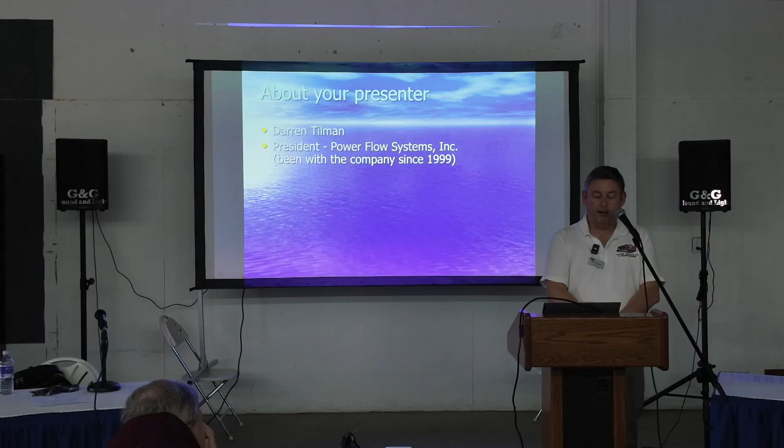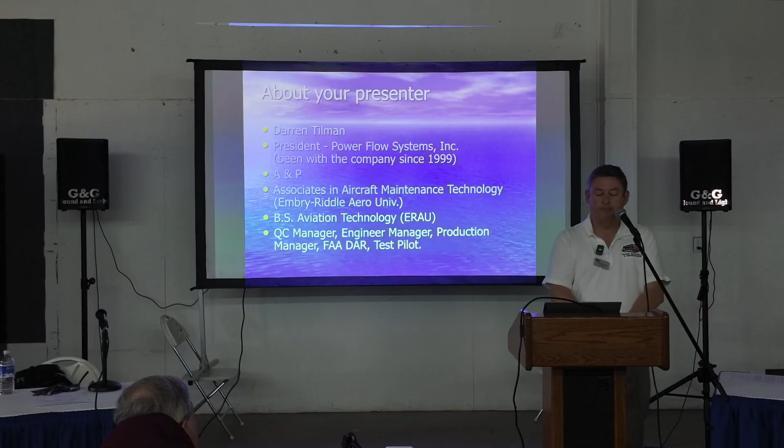So Power Flow, we're in Daytona Beach, Florida. I am an A&P. I got my associate's degree from Embry-Riddle in aircraft maintenance technology, and I got a bachelor's degree from Embry-Riddle in aviation technology, and I got my chapter 11 from Embry-Riddle, courtesy of the bills. I kid, it was expensive when I went like 30 years ago, but today it's literally about 10 times more expensive. Doctors come out cheaper, I think. Yeah, small company. We're not as small as we used to be. We've gotten pretty big now, but technically I also hold the titles of engineering manager, QC manager. I'm also a DAR. The point of that is supposed to be that I do know some things, maybe.

All right, well, who are we? We're the leading designer and manufacturer of tuned exhaust systems for general aviation aircraft. We started in the early 80s messing around with things. We didn't get really serious until the late 90s. Got our first product certified in 1999. That's on the Cessna 172. And then we made a monster and kept going. We now are on 17 major aircraft, 4- and 6-cylinder aircraft engines.

We are also available on some experimentals, but only experimentals that have the real estate to put the kind of tuned systems in that we do. We've got about 7,100 of them flying right now. I'm confident there will be some with Power Flows coming in here tomorrow. We are the OEM exhaust system for the Diamond DA40 and their short-lived twin that had Lycomings. Not because of us, it's because they had to swap engines.

And how many of you ever heard of Leading Edge exhausts? Show of hands. Awesome. Great company. Unfortunately, the founder and owner of that company, Dane, passed away unexpectedly. And we heard about that and said, gosh, this is too good of a product to let it go. There's too many of you guys that may be seeing it or operating on it. We didn't want it to die. So we came along, and in the end, we were the only brave/stupid people that said, hey, we can make that go. And so here we are.

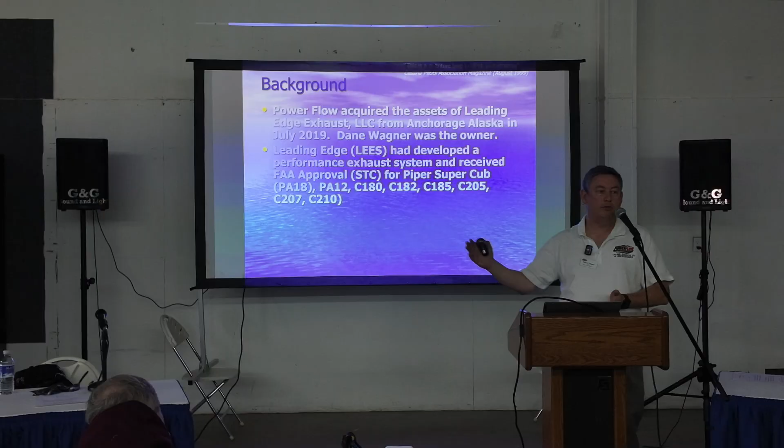We purchased them in 2019. They have an exhaust system for Cessna 180s all the way up through 210s, and then the Super Cubs. And it's a really, really cool product. So we took it, moved the company from Alaska all the way down to Daytona Beach, Florida, because we thought that would be fun. It's also where we are. And we had to learn how to essentially reverse engineer the product and then apply our own technology and engineering to improve on some minor areas and to get it into serial production. We're not quite fully done with that. We're almost at the end point. We've got everything back in full production except the Super Cubs, and that's starting right now.

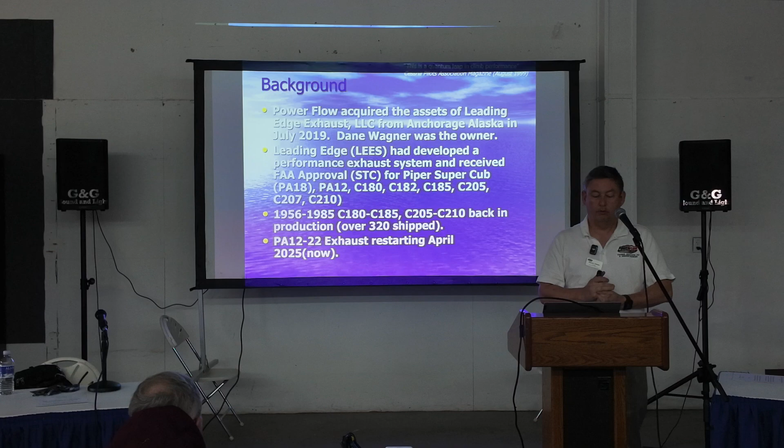Oh, look, I just said all that. We've shipped over 320 Cessna 180 through 185 exhaust systems as of like last week. So we really got them up and running now. The Piper Cubs and stuff, we have the first test cases that are out of house, shipping out over the next month. And those guys are going to confirm what we've done is working well, so we can

then release them. So as an exhaust design and manufacturing company, we have the benefit of looking back at the last 100 years of exhaust designs and saying, what really worked well and gives good longevity and good maintenance operationally. And then we also say, hey, what doesn't work? Tried to take the good ideas, get rid of the bad. In some cases, there is only one way to skin the cat, but there's a lot of other areas that there can be improvements, and we did strive to do that.

Okay, the 4 forces of flight. How many of you have this shirt? I mean, you can't be a pilot or mechanic without it, right? Now, I'm going to equally put down pilots and mechanics. I'm both, so I think it's fair game, right? So, is there anyone from the FAA here, before I make this joke? Anyone going to admit to that? There is a guy from the FAA back there. Okay, plug your ears. Are you here to help us? Always here to help us, that's good.

So, there's the FAA, right? That's a force on the aircraft. They don't teach that in pilot school, but it turns out that's the drag, right? Well, so pilots view mechanics as the drag. It's those darn mechanics always finding things wrong with the plane. Just let it go. Those stupid inspections, we don't like those things. They cost money. I had a really good A&P teacher, a good old boy from Georgia, who said, the mechanic's job is to separate the pilot from his wallet.

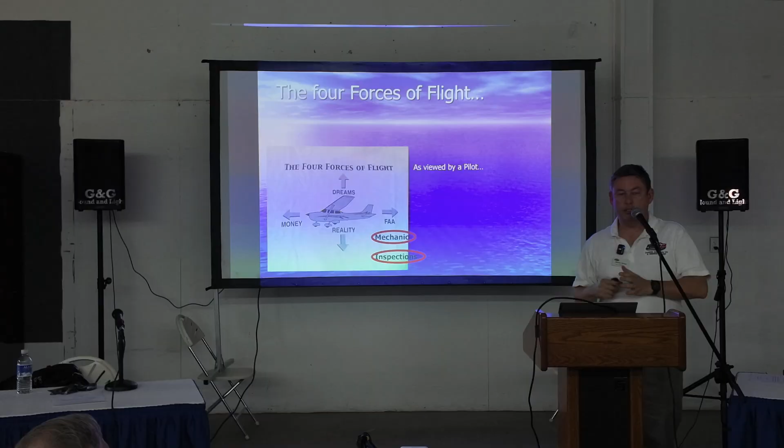Now, I didn't really feel that was a great way to put that, but you know, we're all trying to do the right thing. You want that airplane to fly. If you're going to be in it, that guy's family is going to be in it. You could be in it. You want to make sure there's no problems, right? So it's not really as adversarial as some people view it.

We're going to talk about 4-stroke engines, okay? What I'm going to talk about is in broad terms, because this is meant to be educational. You can apply some of the stuff I'm saying to larger displacement, smaller displacement, even 2 strokes. But it really varies quite a bit, so I'm just warning you. I'm going to talk about 4 strokes. We have a lot of expertise in both Continental and Lycoming at 320 and above.

All right, what's a detailed inspection? Anyone want to give me a sound bite? What would you call a detailed inspection on an aircraft? Well, an annual, okay. So, should an annual be, hey, it flew in, it should be able to fly out? Probably not, right? So the FAA, for good reason, says, hey, you need to have a detailed inspection on an annual. That's opening up your panels, checking the oil, checking your timing, doing all these things on the airplanes, things that probably have not been looked at in depth, at least for that prior year.

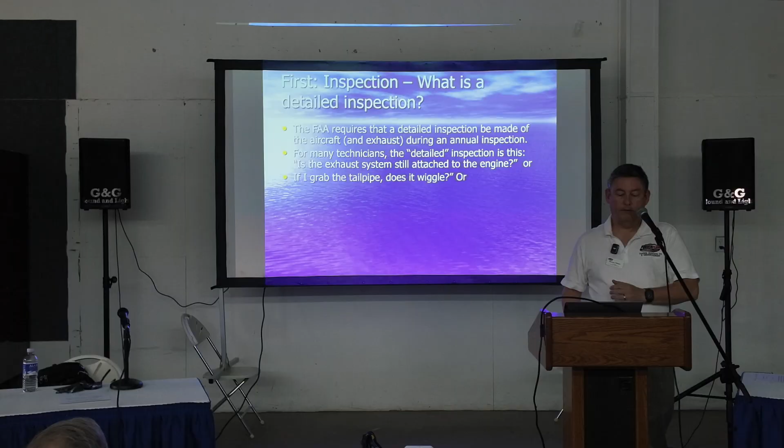Well, they also require a detailed inspection on the exhaust. Unfortunately, and you don't have to admit it if this is you, what a lot of people do, as I've seen in the field, is the detailed inspection on the exhaust system involves, hey, if I grab the tailpipe, did it wiggle? It didn't, we're good. Or, let's just use the CO sniffer to check to see if there's any leaks. Now that's a legitimate method of seeing, hey, is there any cabin heat violation, i.e. the exhaust is cracking and we're putting exhaust into the cabin heat area.

But that's not the whole thing. It shouldn't be the whole thing. It definitely is not the right thing. From my perspective, so much more should be done to the exhaust system. And that's a detailed inspection. So if the detailed inspection on the aircraft is, hey, let's open up things and take it apart and look, the same answer should apply to the exhaust, okay?

And let's face it, on a normally aspirated engine, most exhaust systems aren't really that hard to take apart. And in a lot of cases, the exhaust systems have things built into them that are supposed to be maintained and disassembled routinely. And if they're not, the built-in failure mode now occurs where the thing that's supposed to move can't. So guess what? It now stresses things out.

Why does it matter? Okay? The FAA has put out a whole study where they said, hey, the top reason for carbon monoxide poisoning is the muffler systems. Well, I mean, that makes sense. You're not getting CO from anything else.

In 92% of the cases, the muffler had more than 1,000 hours in time and service. So mufflers are generally where we get our heat from in normally aspirated aircraft. Why? We don't have a liquid-cooled engine usually. Yes, technically there's oil, but we don't use the oil radiator, so we're running air over that manifold. We want that air to be free of exhaust gas and issues.

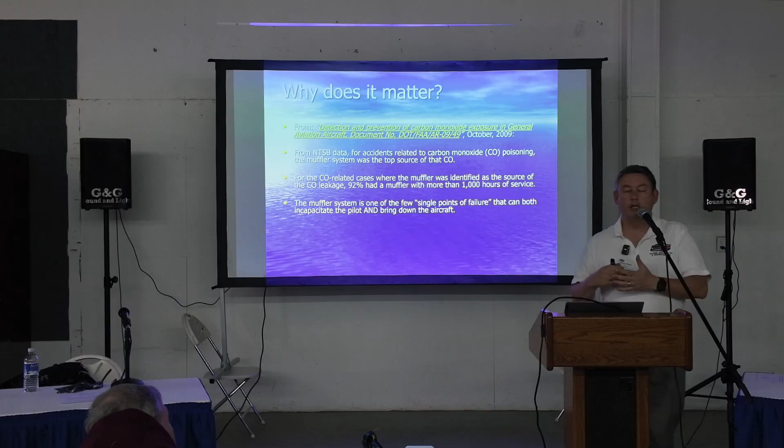Has anyone ever had CO in their cabin before that they noticed? You have? Yeah? How'd you notice it? We were getting kind of dizzy, and then the thing started turning black. The little, the dot of death? Yes, okay. So you were getting a little dizzy. So it was a known issue, though. It was a known issue. You're a brave pilot. We thought we fixed it, and we went up. That's fair. It wasn't fixed. Okay.

You know, CO is not something to mess around with. Yes, you had your early warning signs. You eventually saw the black dot. You noticed it. You were aware of it. That's good for you. You didn't continue the flight and say, well, I'll just breathe less. Because ultimately you were going to breathe less, as it turns out. Spoiler. So you want to be aware of that.

There are lots of tools out there for us pilots and operators that really should be taken advantage of. You've got CO detectors you can put in the cabin. Heck, you can go down to Home Depot or wherever and buy even a household one. They're not great, but they're better than the black dot; it's very passive. If you're not paying attention to it, you're not going to see it. And by the time it's turned black, it's probably not so good.

Lightspeed has a headset with a built-in CO detector. It's a pretty aggressive detector because it'll pick up gases that have circulated into the cabin just from weird airflow if you've got the windows open. But I'd rather have that as a warning than feel kind of faint and go to sleep. So we always want to be aware of that. Our job as mechanics is to make sure we are keeping it as safe an environment for the pilots as possible.

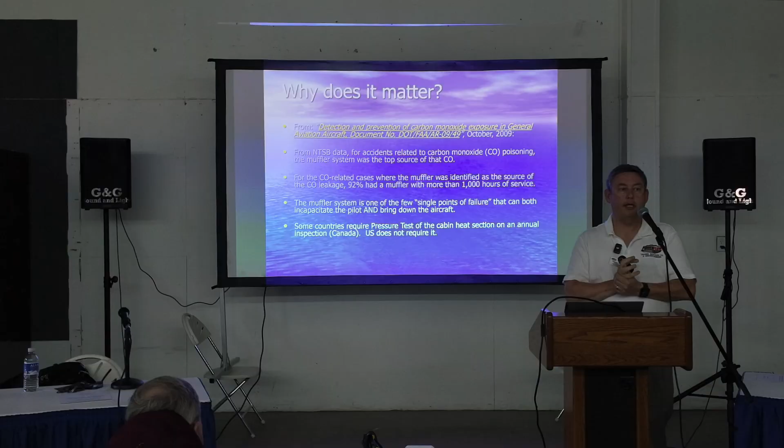Some countries require aggressive testing, i.e. pressure testing of the cabin heat. Oh, I gave it away. It's Canada. The US does not require that. Why? Is Canadian air different? It's colder? Well, it's apologetic too, but it doesn't make sense not to pressure test that. I don't know why it's never really come down past the border, but as a technician, I will pressure test things. It's not required, but I'm not going to be the one signing it off and saying, well, I could have looked at it and I didn't.

All right, stress and vibration, okay? What causes stress in aviation besides the FAA?

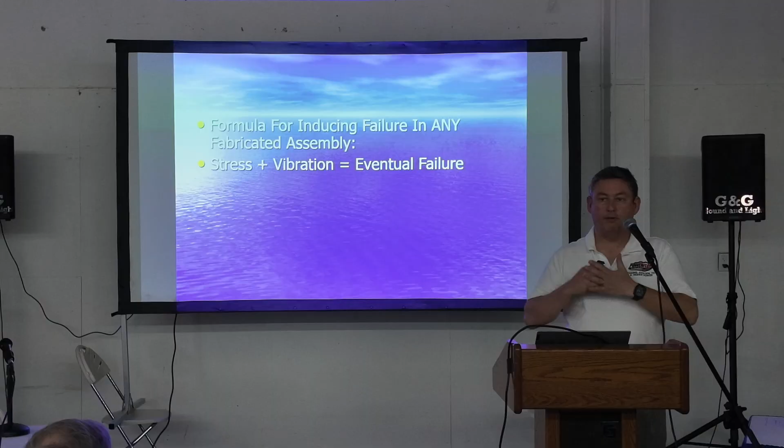Okay, well, all right. You're flying something, most of us are flying things with propellers and engines. It's a giant vibrating object, series of objects to be fair, right? And vibration is a stress, okay? So if you have something that's vibrating a lot, you're adding stress. You've got an exhaust system that's attached to an engine that's got 4 or 6 cylinders, pistons flying around, okay? And they are creating different harmonics and different resonances. Ultimately, things add up. So what do you want to do? You want to avoid that, or more correctly, diminish it.

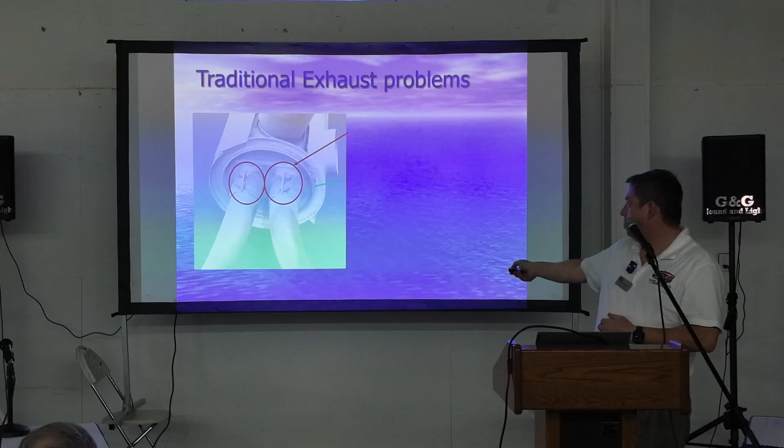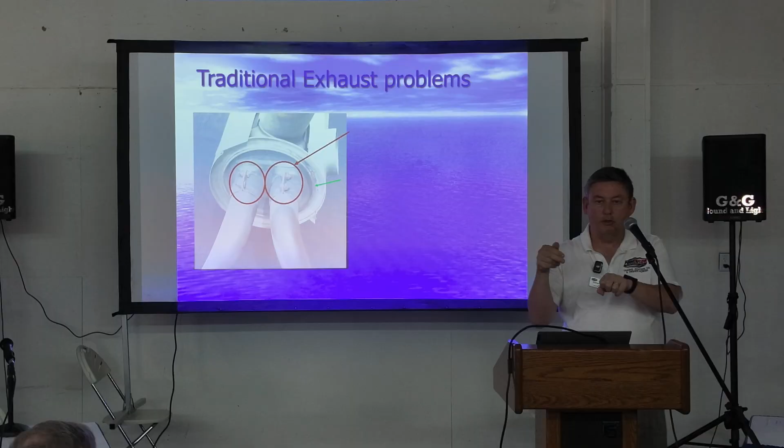So that's an okay thing, but what happens is your engine is nothing more than an air pump, and it's pumping air through. And so the ultimate effect of that, I'm going to exaggerate the motions, is this cylinder moves, and ultimately everything over here pumps in. So you get a little movement over here, then back here, and then back here. So what's happening is those risers and that central muffler assembly is getting pumped and pushed, and it wants to move. Eventually, it will make room.

You can't see it because of the way this is presenting, but there's some yellow streaking going on. That yellow streaking is exhaust starting to leak out, and it's from that movement. The failure mode on this is not something that happens in 100 hours. This is like 1,000, 2,000 hours typically, where those beads start to wear out. And the answer is, it's a part that's going to need to be replaced.

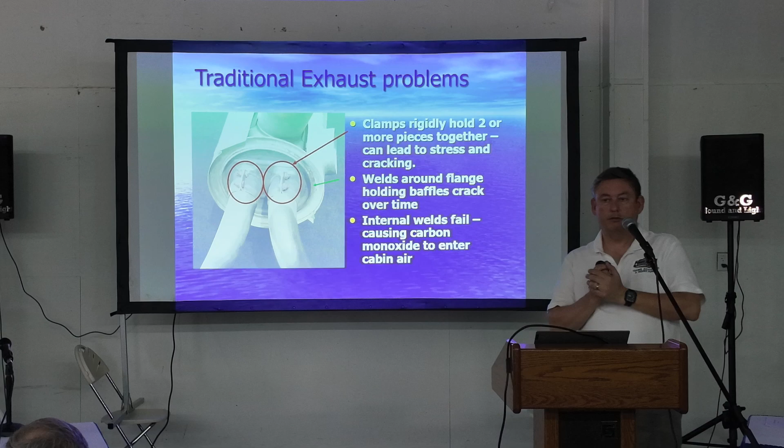Another place to look. Here's a good thing to know. Anywhere something's been welded is an area where there is going to be a potential for stress. Typically, it's not on the weld, it's around the weld. It's called the heat affected zone. These mufflers have these stamped flanges, and there's a big old beefy weld going around that. Okay? So typically, you will see cracks in this area or that area.

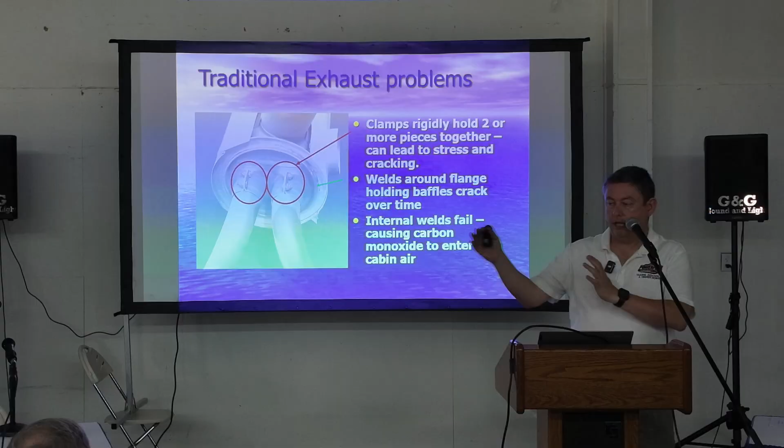Why? Because your engine's that big air pump. It's pushing a lot of air in, and then it's getting it directed from both sides, and some of it's ultimately fighting the other ones, and some of it's coming out. So basically, your muffler's kind of doing this many times per minute. Okay? That's very exaggerated, but that's what's happening. So you always want to look wherever there's a weld. You always want to look around for a crack.

Over here, that's supposed to be carburetor heat, supposed to keep out nuts, bolts, and small children. I would argue it's not very effective. Anyone want to buy that one? Yeah, see, it's missing parts of it. So that's an issue when you should be looking at it.

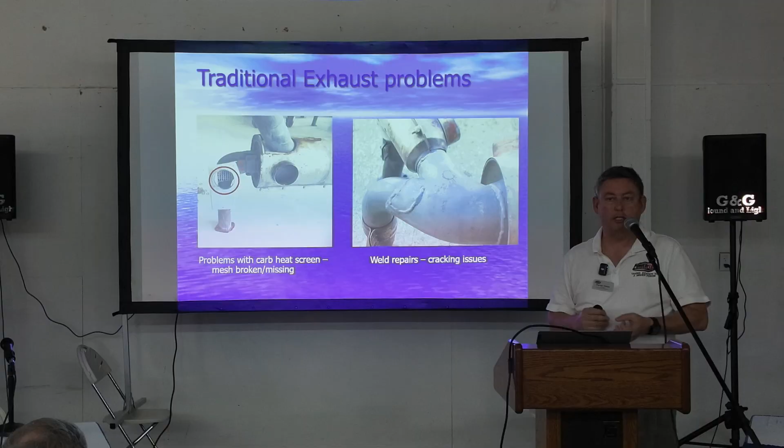So what I always tell pilots that want to learn stuff, I say, look, get to know how it's supposed to look correctly, so you have a baseline for comparing to when it's not correct. When there's mesh involved, I tell them, just touch it lightly. If it moves, it's not supposed to move.

That's a problem. Over here, this style exhaust system is commonly called a Naleno style exhaust. Instead of having the two pipes going into the muffler, they Y together and then they go in. Similar things are found on, say, 6-cylinder Cessnas, where the risers kind of look like a W, and they kind of all form together, and then they go in.

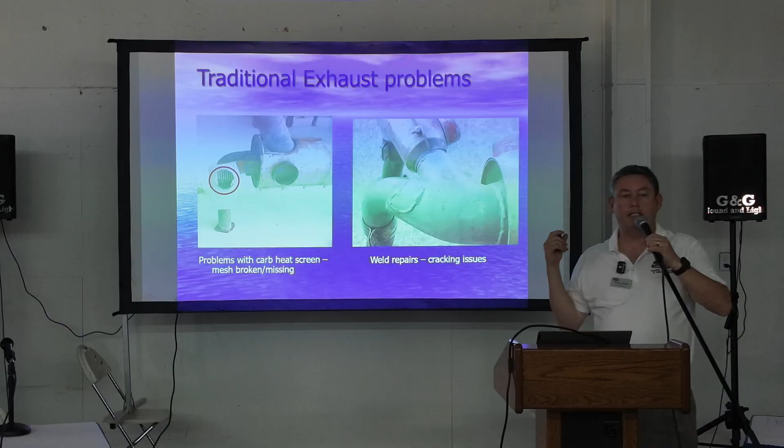So this one's fun. Do you see the patch? So apparently it was okay to patch. Well, the fun part was that's a patch on a patch. How many patches are allowed, mechanics, on a muffler, do you think? As many as you can get on. That's an honest answer. It's functional. I don't know. Now, why is it cracking there?

It's cracking because those cylinders, each one is trying to move and expand and contract slightly differently. It has a natural tendency to want to have the ability to move. But when we've made them go together, there's no movement allowed. So the crack was the stress relief. It made its own movement. And then the mechanic came along and put a patch on it.

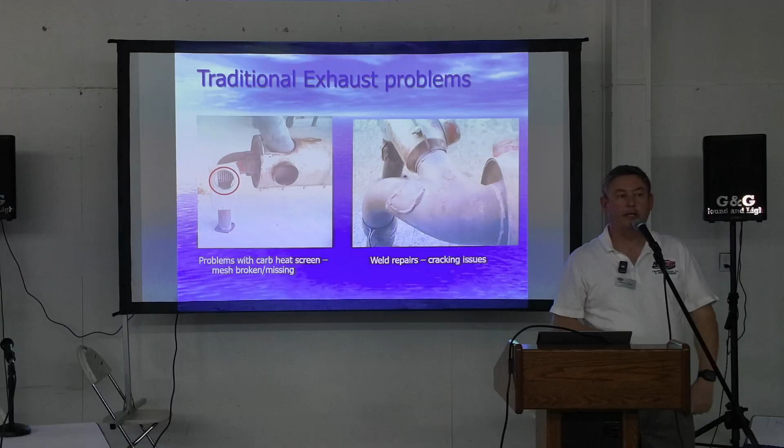And then, darn it, didn't it happen just a little while later? Another patch. And then as many as you could fit on, right? So why is that? Intrinsically, it wants to have movement. It wasn't allowed to get it. It made its own.

This is another example of when something wants to move and can't. This is where these two, this is a Y pipe, goes in here. Okay? And spoiler, you're about to see there's a big crack here. Apparently there we are.

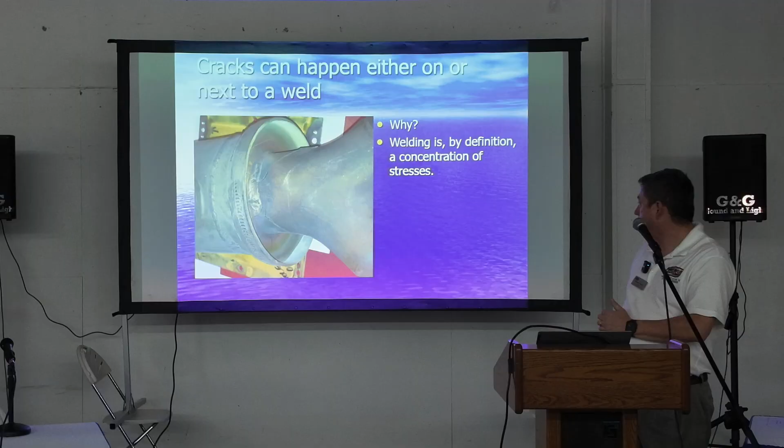Why did it crack there? Because it wanted to move and it couldn't. And now, remember I said, look adjacent to the weld? Here's the weld, there's the crack. Now, it's possible the weld may have contributed to the weakening of that area. In fact, that's very likely. Or it's also the inherent design of that pipe. It wanted to move and it couldn't, so it relieved itself.

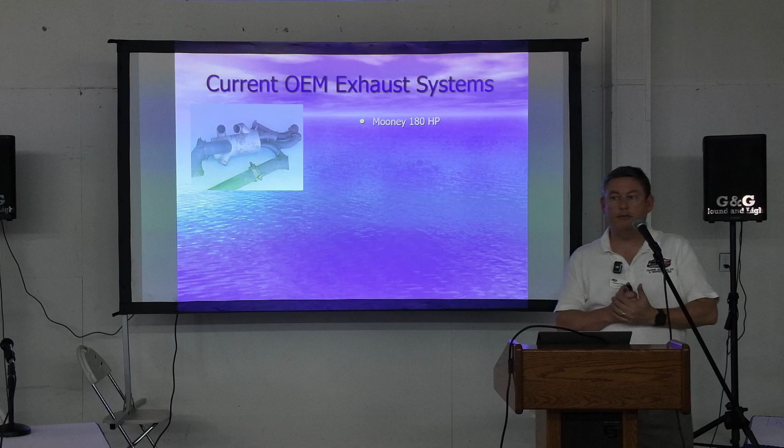All right. Let's pick on a Mooney's. Yeah, any of you have any Mooney's flying around up here? They're not a very Alaskan kind of airplane, are they? It's probably to do with that 3-inch of prop to nose ground clearance.

Anyway, so on a Mooney, underneath that heat shroud is this. Now, there's some ridges in there. Any idea why there's ridges? Heat exchange. Heat exchange, nice. Anything else? Strength. Anything else? Expansion, possibly. So all of those are really good answers, and in my opinion, they're all correct. The way that those ridges are put in there, that's metal that was flat and has been stressed to make a ridge. Where do you think the crack's coming? Where that stress was, that ridge was made.

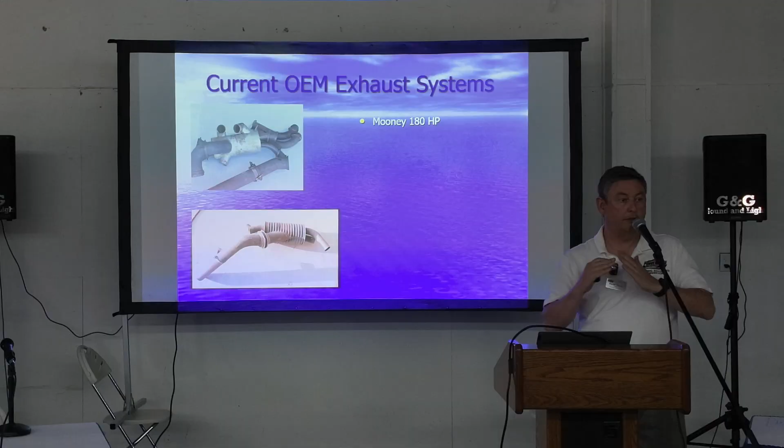But on a Mooney design, this is the same source of cabin heat and carburetor heat. You have them both. That is not allowed in today's certification standards, and the reason being, if you have a true backfire and you had your cabin heat on, and you had your carburetor heat on, you've just created a gas pathway to come in through the cabin heat. 4 out of 5 pilots would agree that's not good.

You guys are good at math, right? What happened to the 5th one? Right? I told you, my jokes don't get better.

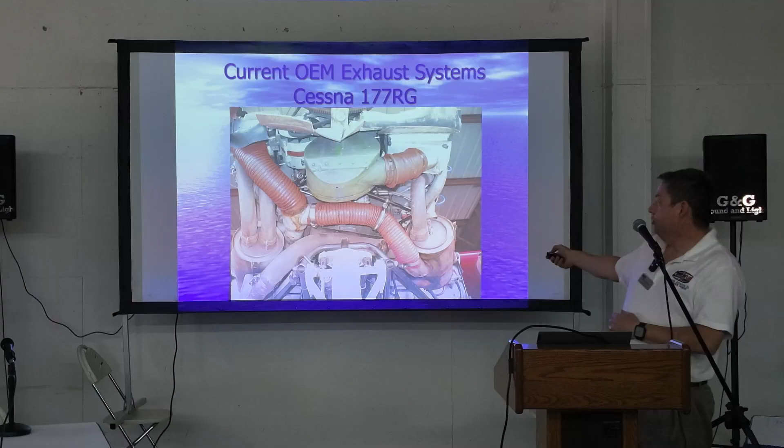All right, Cardinal RG. Anyone ever seen one of those flying around? Anyone know who Rube Goldberg was? Okay, I think he designed it. He's probably designed a lot of things, you know. Here's the Rube Goldberg special. Here's the risers on the pilot side. They're coming into this can, and then they have to jump all the way over to cross over into this can, which is joined up with here, and then over there. This is from an airplane that came into our facility.

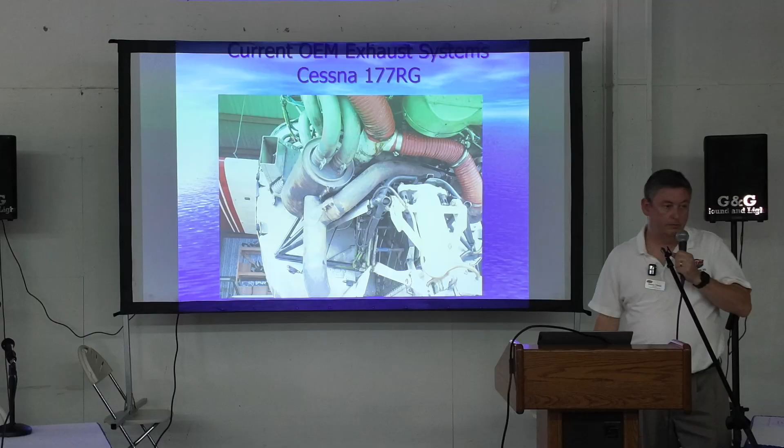There's those lovely beaded clamps. I'm moving too much there. Lovely beaded clamps. You can see all of this contraption. Now, anyone that's ever worked on a Cardinal RG will tell you the exhaust is terrible. It's terrible because there's so many points of failure in here. This particular airplane had come into us after having been worked on at a Cessna service center who'd given it a clean bill of health. They apparently felt there's no such thing as too much safety wire to hold things on.

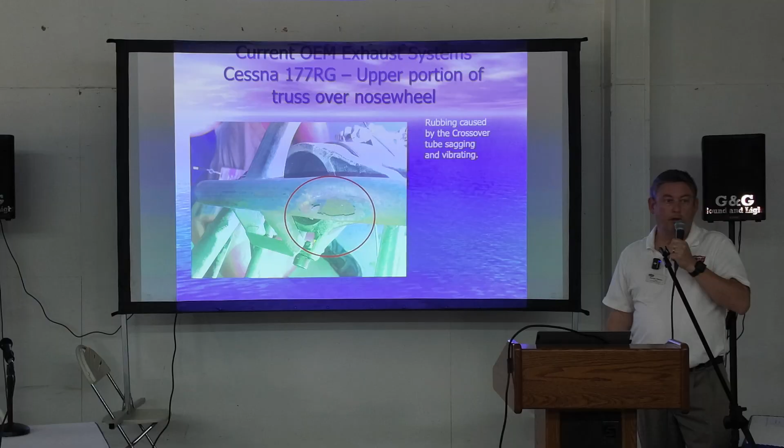So he came in, he wanted to get an exhaust system. We said, that's fine. And he said, well, gosh, this seems kind of close to that nose truss. That's probably important. 4 out of 5 pilots would agree the nose gear should work. And what happened was, once we removed the exhaust system, that's what we discovered. Okay, smart mechanics out there, how much of that is okay? Would we agree that it's not okay? Yeah. Now, had this exhaust system ever been removed during that annual, guess what they would have seen? They would have probably figured out that that's starting to make contact. But did they? No. They felt safety wire was the appropriate thing.

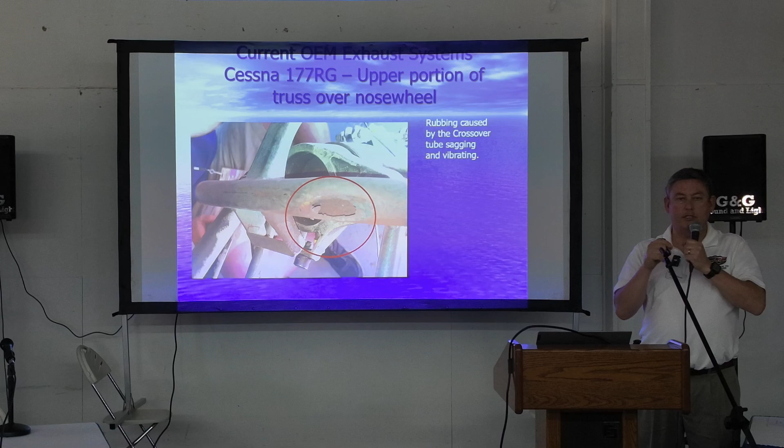So the Cessna Cardinal has, I believe it's 3 different service bulletins. Each time they added a new layer of structure to help support the weirdness of this exhaust. And these guys had just, at some point, the mount had broken, and that's where some safety wire came in, because, you know, that fixes everything. And this whole thing started sagging down against the truss, thereby creating a new problem. So that's caused by that crossover tube.

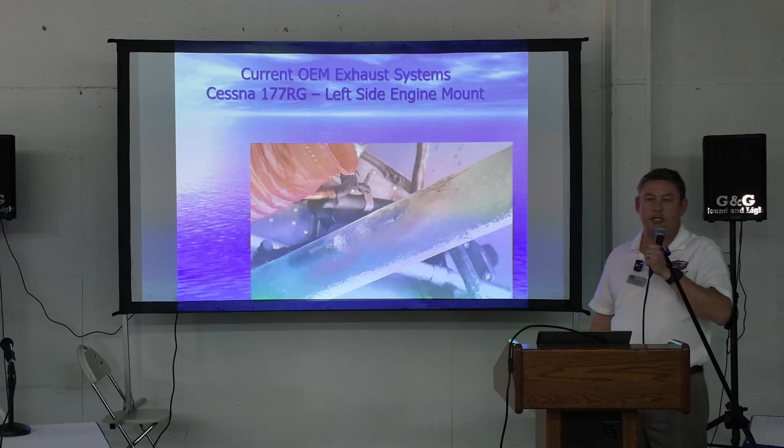How much metal can be eroded from an engine mount? Anyone want to shout out an answer? Yes, or taken away. No, the FAA guy is going to plug his ears. You're okay, go ahead, speak. Okay, so roughly speaking, usually if all else fails, they would default to AC 43.13, and it's 10% of the wall thickness. I'm pretty sure that's more than 10%. I think we could agree. So it's bad. Did this happen overnight? No. Again, I'm giving you real-world examples why exhaust systems need to come off the airplanes periodically for a detailed inspection, because you sure weren't doing a detailed inspection on that truss with the thing in the way.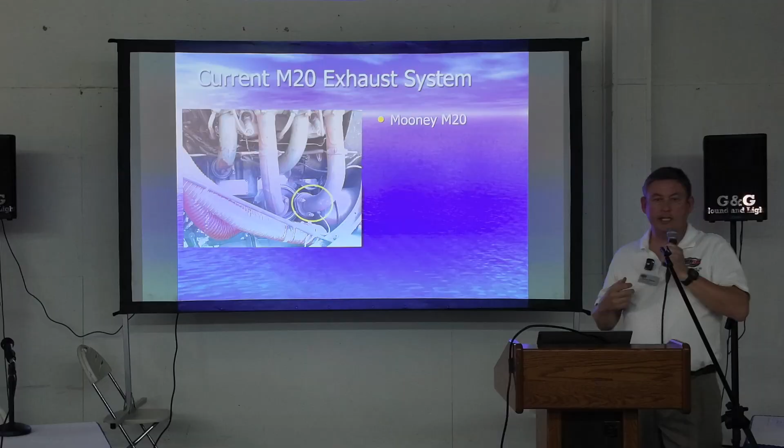There it is. Okay. Ball joints. We love ball joints. Ball joints are great. They give you the ability to have things move. But a ball joint has to be maintained. When I say maintained, it should not be frozen up. If it's frozen up, it is no longer working as a ball joint. You might as well have welded it.

So this is commonly found on, again, things you don't find a lot up here at Mooneys. A lot of Cessna twins use ball joints, okay? Not if they're turboed necessarily, but the normally aspirated ones will use ball joints. Same thing. They should come apart periodically. Now, what do you do about them? High temp anti-seize is a good answer. That'll free it up. If the hardware looks corroded, it's probably bad to leave there. Maybe take it off, replace it.

Okay, inside most mufflers are these things called flame tubes, cones, attenuators. Their whole purpose in life is the gases coming into them then have to diffuse through it. Through some miracles of physics, that's a gas exchange and it slows it down and ultimately it makes it quieter. A little quieter. And those are okay as long as they're intact.

So, another thing I encourage a lot of people is to get used to looking up their tailpipes. Okay, now with today's day and age with borescopes, etc., you can put something right up there. You don't even have to get too creative with a flashlight, especially if there's angles involved. But look up there, get to know it.

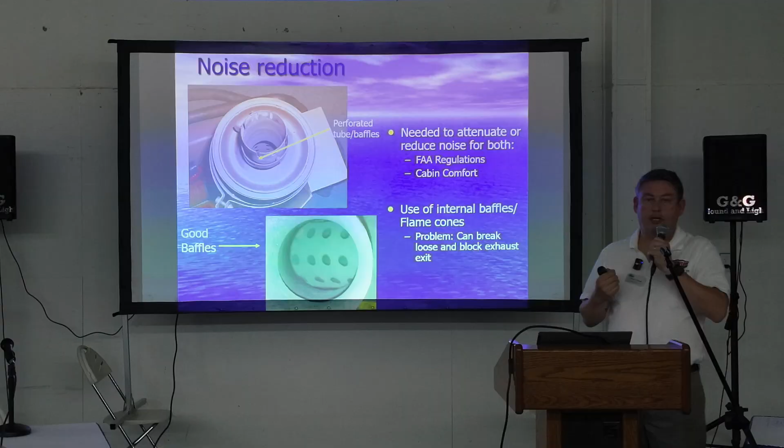Looking up the tailpipe, looking to see how intact that is. Old mechanic trick, you take like an old wooden dowel or a broomstick, you push it up. You reach it, you make contact. Push lightly. If it comes up and then goes clunk, clunk, it's not good. Time to replace that.

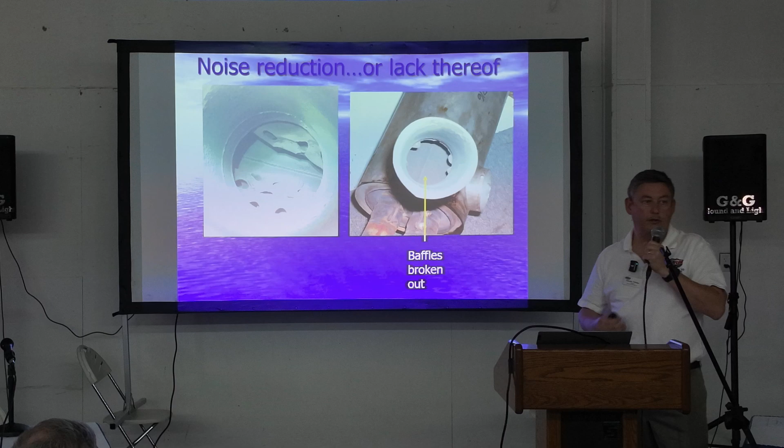Oh, look, here's some examples where things were not going well. This guy got lucky because the flame tubes blew out and it did not make a new hole. Now, technically not airworthy any longer, but also probably a little louder. Some of these exhaust systems, these flame tubes are actually kind of structural. And when you take away the inner support of a structure, it's not good. So you also want to keep that in mind.

Here's some more good, bad, ugly pictures here. Ooh, this one's a fun one. Anyone recognize, well, yeah, sure you do. This is an exhaust system on a Cub, a PA-28. They've been using this style since the 30s. Okay? Very interestingly, it had some good elements to it. But right down there at the bottom are two slip joints, which are never ever maintained by most people.

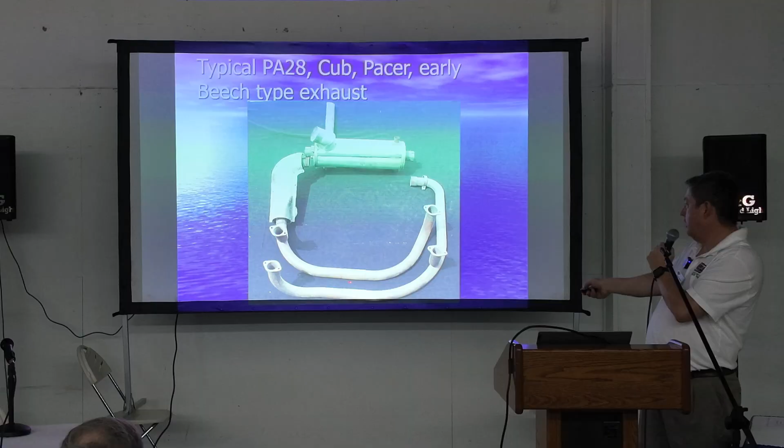So your engine is trying to expand and contract, cylinders are trying to move, we don't let them. So these things get stuck, so then they stress out the flanges, or they stress this out. Gases come all the way into the back here, they fight through this muffler, which has a recurring 100-hour AD, we're all familiar with that if you're an IA or an A&P. And that AD is because, well, this thing kills people when it cracks. We don't want it to kill people, so we have to keep checking it.

And inside of that, that's where your cabin heat's coming from. This is a cabin heat shroud. That one also lives up to your point about you just patch it as many times as you need to. It's common to find 3 to 5 patches or crack repairs on this. I mean, it's okay, it's what you need to do. That's a stupidly expensive assembly. That's at almost $2,000 last time I checked. It's not a $2,000 part, it's just the way it is.

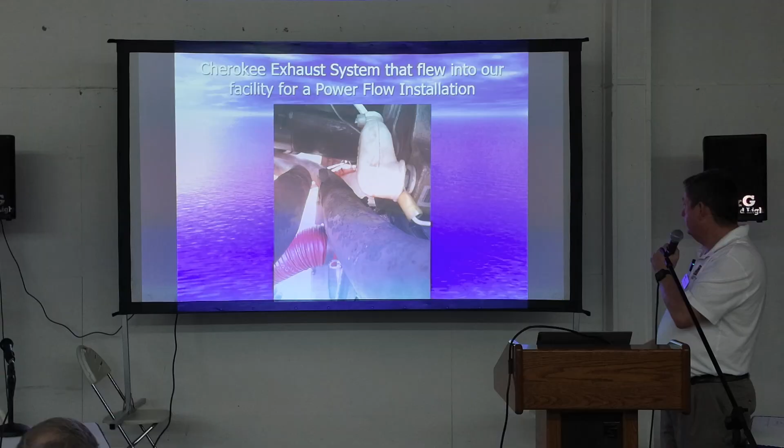So we had a Cherokee come in, and the pilot says, oh yeah, I had a little backfire when I did the mag check. So, well, can you describe backfire? And he's like, well, it went boom. And I said, okay, thank you. I said, did you maybe turn it off? He goes, yeah. I said, did you turn it back on? He goes, yeah. I said, okay. So he said, it's okay now, it flew over. I said, that's referring to my last thing. If it flew in, it can fly out. That's not always the right answer.

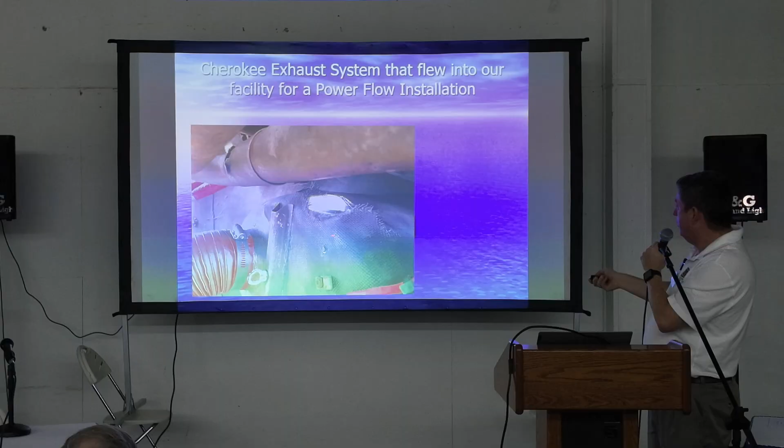So then we took a little closer look and we said, this is looking a little weird. Let's look a little closer. Oh, how come I see daylight through your air filter? That's, by the way, not a feature. I don't think the filter's filtering very well when it's got that going on. And he goes, well, I don't know. And then I looked up here and I said, I see shrapnel. Did you take flak? And the real answer was, yeah, that's a zoomed in thing.

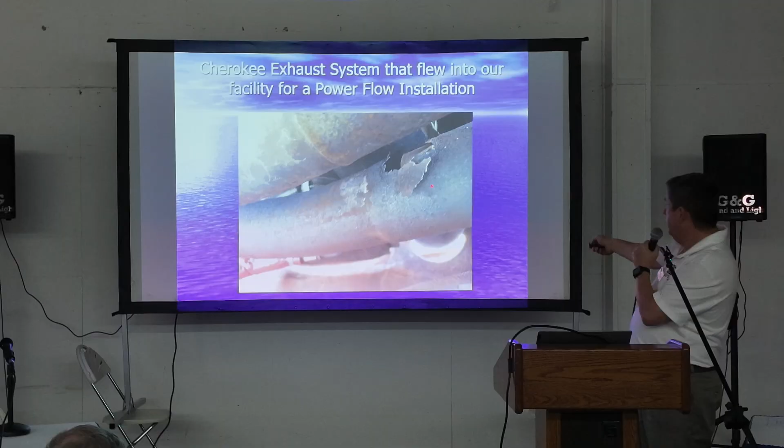So this guy had overpressurized his exhaust when he turned off the engine and turned it back on. And the miracle of science with the combustion, it went boom, and it blew out the weakest point. Remember I said it makes a new hole? There it is. Unfortunately, that hole was also facing his air filter. When we took it off, this is what we found. And we said, well, no bueno.

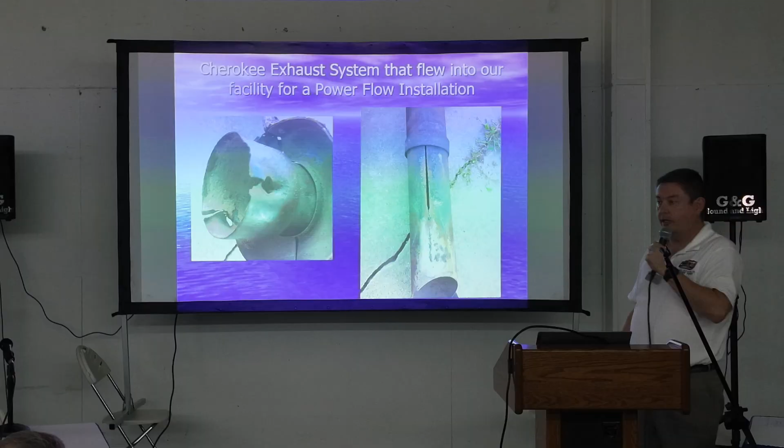This was the end of his muffler, that's the feeding in point from the risers at the back. This is his muffler. Do you think this guy's had a good annual recently? Maybe ever? Right? Congratulations, you found where the tube was welded and you took it apart. Okay, not good. Inexcusable to me. Whoever he was going to get his inspections from is not doing anyone any favors. All right. Yeah, okay, well, I already said that.

All right, so what's the purpose of an exhaust? Get the gases out of the engine and away from the cockpit and the aircraft, right? We need a heat source for the cabin. You need one for a carburetor. We'd also like to reduce the noise. For certified airplanes, there is a noise standard. You must have a certain decibel level. It's a convoluted test. Okay, it's also very fatiguing.

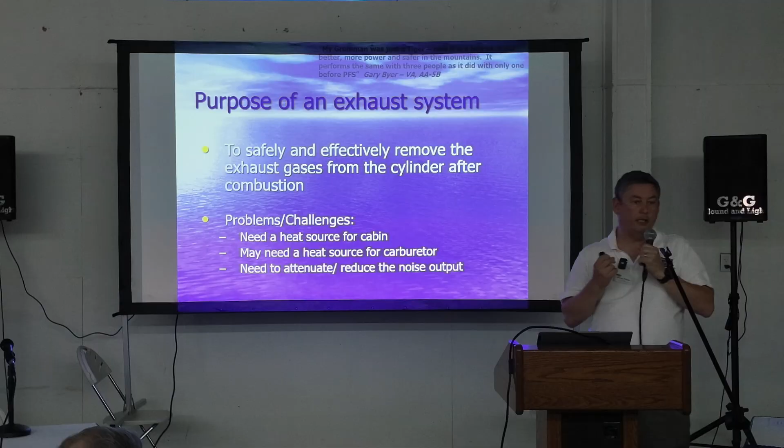Do they fly RVs up in Alaska? Yeah? Yeah, okay. RVs are usually really loud, right? Because they have no mufflers. So they're really fatiguing. So the solution to that is you buy good ANR headsets. Okay, well, that's one way to do it, right? It's like driving an open pipe Harley across the country. You're going to be more tired than if it was a quieter muffler. Why? Noise energy is noise energy. And your body has to fight it.

So, let's talk about an exhaust system design, elementally. If you didn't care about any of those things I just talked about, cabin heat sources, noise, nothing, well, there you go, you've got it. That's a P-40, I think it is, but it's also found on the P-51. It's just open stacks. Okay, loud as all get out, but we don't care. But you're not going to have any benefits from it. It's not going to hurt the engine, but it's not going to help the engine.

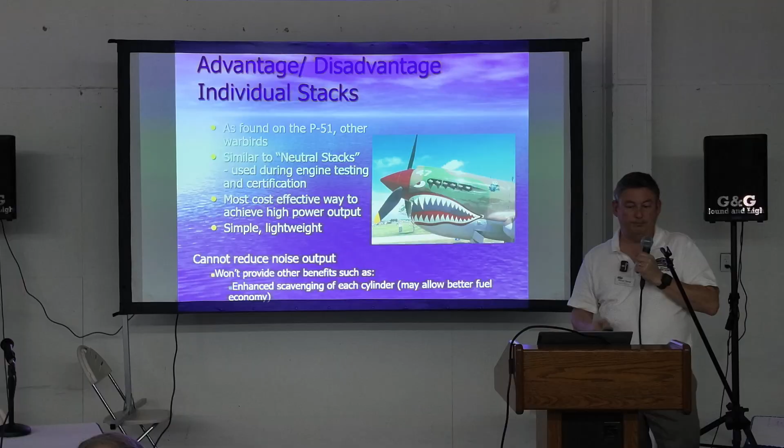Here's an RV, this is a typical RV, it's a Vetterman exhaust system. So on a Lycoming engine, the firing order, strangely, is right side front, right side rear, left side front, left side rear. 1, 3, 2, 4. I don't know why they did that, that's the way they do it. So here, the gases come out of this cylinder, come all the way across. They get picked up, they join with the gases from here, and they go out. There is no muffler in there. The same is true on the back side, okay? Very, very cost-effective exhaust system to build. Doesn't have a lot of area for cabin heat, doesn't have any muffler, but it works.

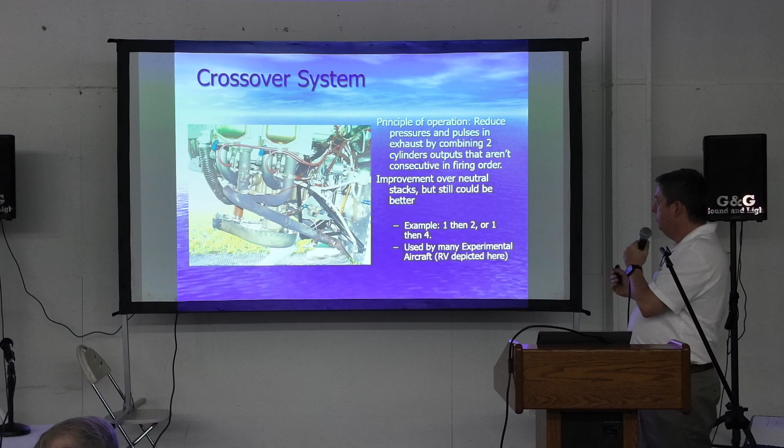And it works really well in the sense he didn't tie the cylinders together that were going to fight each other. The worst exhaust design you can have is the cylinders that fire right next to each other and they join together. 1 and 3 should not be tied together. It's a bad idea because the gases from the 1 are going to fight with the number 3. This guy doesn't do that. That's a crossover system. It's called crossover because it's crossing over the engine. Or really, it's crossing under the engine.

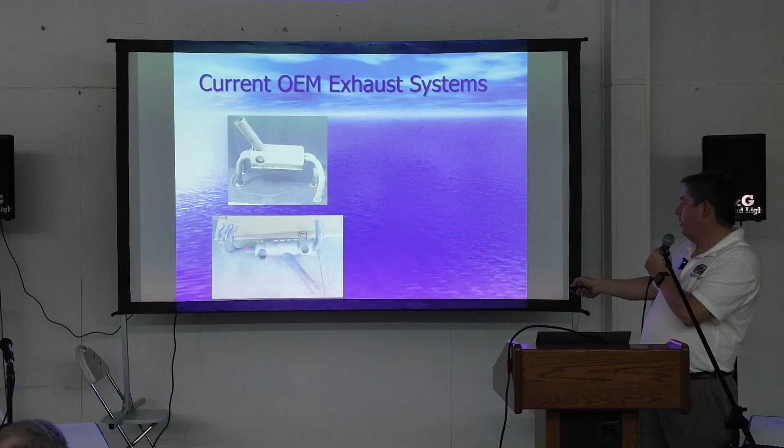Now, they both start out life, they started at something like 105 to 125 horsepower. And the simple answer in aircraft design and manufacturing is, if it's working already, leave it alone. So that's what they did. They literally just kept everything the same, and if the engine got wider, they just added a little length to the risers. That's all they did.

So if this thing was designed originally for 125 horsepower with a 3-inch output, if you make that 150 horsepower, can we all agree empirically it's probably a little more resistance? Well, what if we make it 180 horsepower? It's even more resistance. Well, this same thing is a 3-inch pipe. That's either 2 1/4 or 2 1/2, depending on the version we're looking at. This is also used on 180 horse.

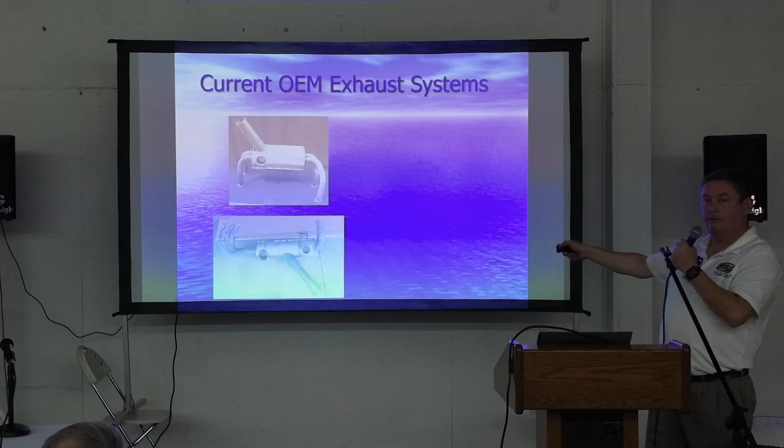So just without knowing anything about any kind of design, the guy with the bigger hole is going to be less restrictive. So this Cessna exhaust fits in larger cowlings. Grummans have smaller cowlings, so they have to go with smaller everything else. Not great from a design standpoint, but it's a functional standpoint. Oh, look, I gave all that away.

Cherokees, they started out 65 horsepower Cubs, used it all the way through 180 horse. Right? Doesn't make a lot of sense, but it was good enough. Now, the aircraft manufacturers didn't have many choices. We weren't around, and even if we are around, there's a competitive issue.

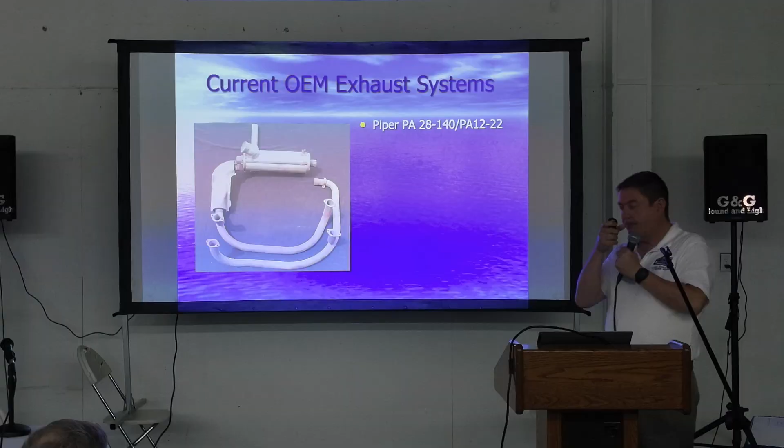If you didn't like your Cessna 172, sir, step into the 182. 182 is not enough power, step into the 185. That's just regular salesmanship. Let's just sell you into the next bigger thing. They're disincentivized for making the 172 operate closer to a 182. They would sell fewer 182s, all things being equal. The same thing with Pipers, etc. So they were never incentivized to do it, right? It didn't make sense for them.

All right, so this has a 2-inch output. So 180 horse has to come out of a 2-inch pipe. Not so good. All right, so how does the tuned exhaust system work? The whole concept of tuning is not new. NASCAR and all the racers figured this out in the 50s and 60s. Let's make the headers for your plane or for your car, let's make them so your engine breathes.

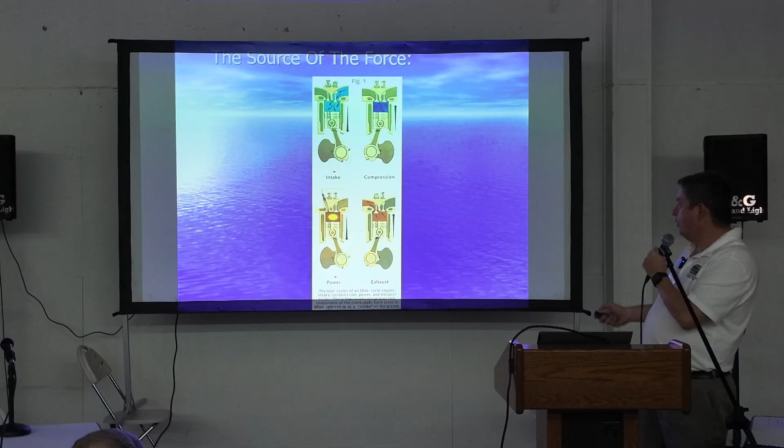Now let's define what is breathing. Let's get the cylinder empty as much as possible so you can get as much new fuel-air in there as possible. That's its whole concept. How do you do it? Well, it's the source of the force, right? 4-cycle engine. Intake, compression, power, and exhaust. So if you have a traditional exhaust system, let's picture this. You guys just turned into a combustion chamber, okay? There's your intake, there's your exhaust port.

So we filled this area just from a standpoint of, we've got to start somewhere. Boom, you're all in here, you're all fuel-air mixture, you're in the right ratio, you're ready to have a good time. You're going to explode, okay? And then we compress you, we spark you, boom, you've exploded. And then I open up the exhaust side, and instead of allowing you to just escape gracefully, I've actually met you with the force from the other cylinders. Some of those gases are holding you back. So now I've got a 60-mile-an-hour wind pushing in while you're trying to go out.

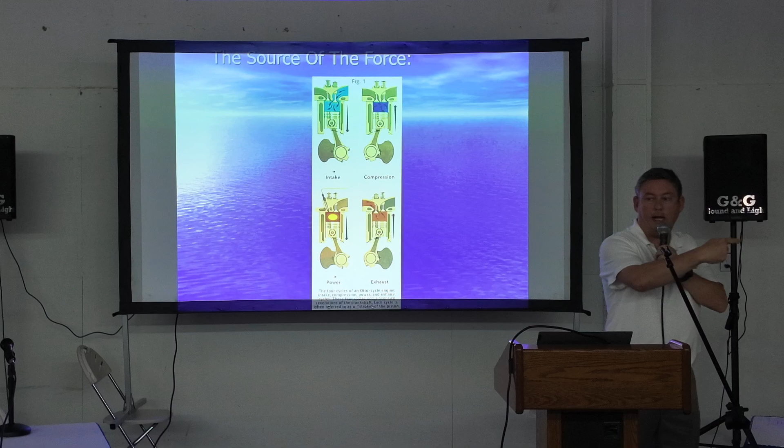So by some miracle, eventually, most of you get out, around 70 to 80%. We open up that, and now you're trying to go this way, they're trying to come in, but that pressure is going the wrong way, it's a suction. So now you don't know where to go. So as a result, some of you stay in. And now you've been burned, you've all exploded, so what you are is residual heat. We see it as cylinder head temperature. But you're also occupying space, so not only are you hot, you're also taking up some of my space.

So now, my cylinder volume is reduced by somewhere in the region of 20 to 30%. And I'm stuck, because the cycle of that engine is going to continue. That door is going to shut, that door is going to feed in some fresh air mixture, and we're going to cycle and repeat. The idea of tuning is, let's not do that. Let's not let those gases from the other cylinders fight with you. Let's actually harness them and make a suction.

So the idea of tuning is it's made up of three elements: a primary tube, a collector, which is literally by definition where the tubes come together, and a secondary. The primary and secondary are designed to be a certain length, diameter, thickness, and material.

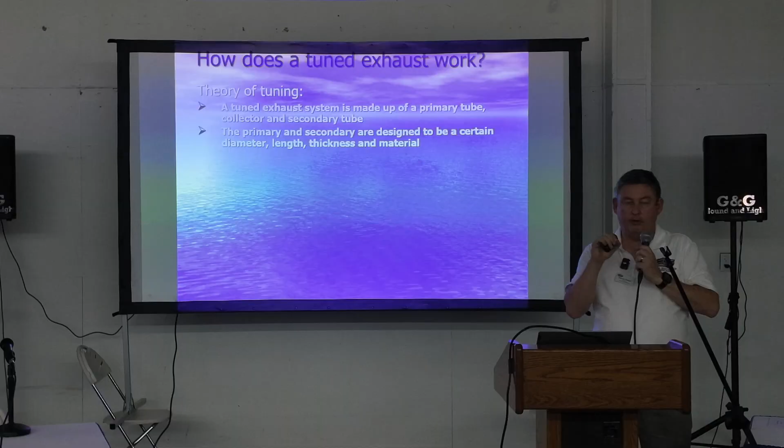If the cylinders are capable of equal power output, then the primary tube should also be equal. That makes empirical sense to most of us, which is, well, why would you want one tube to be 12 inches and one to be 35 inches? Right? There's going to be things going wrong there. So let's make them all the right number.

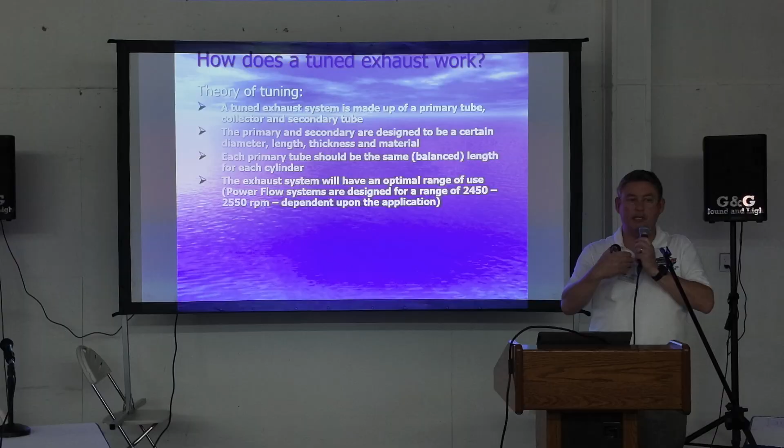And then it has to be the right number to create the pressure pulsing that we want to do. And as a result of that, you can essentially tune the exhaust system so that it is going to be the most responsive or the most suction at a given resonance or a given RPM. We see it as RPM as operators.

So, how does it work? I'm going to show you a slide, and I'm going to have to go reasonably fast through it, so just bear with me. So, the way you can get stuff in and out of this room is when both doors are open. That's overlap. Overlap is when the intake and the exhaust valve are both open. So that's when we can push or pull air around. Okay, otherwise it's a one-sided battle.

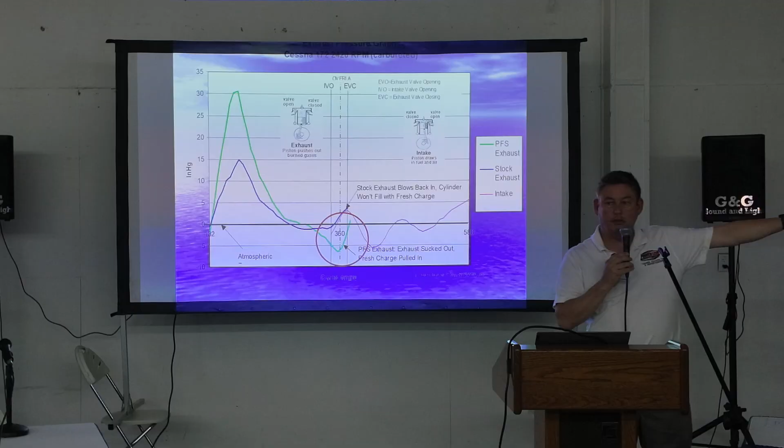So when the exhaust valve opened after combustion, the peak pressure came up, went to 15 inches of mercury, and as the engine continued to cycle through, the peak pressure came down, and then it became kind of a suction. And then when the intake valve opens, that door opens, the exhaust went positive. Well, if I'm trying to get you out the door, how are you going to get out the door if there's a breeze pushing you back in? There it is, there's that breeze.

Meanwhile, the intake is kind of a suction. So you actually are incentivized to go that way, not that way. So you're not going to want to leave your cozy little chamber. So eventually the exhaust valve finally closes, the intake's more of a positive pressure, and then the cycle goes on.

The tuned exhaust system comes along, there's the same spark point. The peak pressure is actually a little more than twice as high. And then here's the cool part. It then takes a big dive towards suction, and now it's sucking. And right here, your door, instead of a 60-mile-an-hour breeze, is a 30-mile-an-hour suction.

Meanwhile, the intake, once that's opened, it is still negative, but it is less negative than the exhaust, so essentially it's more of a positive. So you're being sucked out that way and pushed in from this way. Guess where you're going to go? You're leaving the building, folks. You're going out the door. So then that suction gets really strong about halfway through that overlap, and then eventually comes up. The whole time your intake pressure is going up.

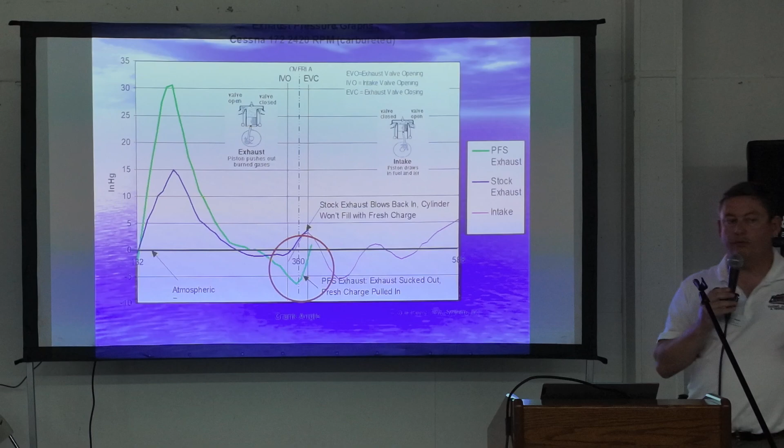So the end result is this room that was only getting 70 to 80% emptied is now getting somewhere around 97 to 98% emptied. So your cylinder heads are suddenly less hot. Why? You've left the building. We took the exhaust out of the aluminum and put it in the stainless. That's good. So that's emptied. You're here now. There's more of you in here that are ready to make power. So we just improved the ability for that cylinder to create power.

That's the net effect of a tuned system, is it makes more power. It's an efficiency change. It's technically a volumetric efficiency change to the engine. Why? We've emptied the cylinder. That's a close-up, and I'm going to let that come through here. And if you want to take pictures of that, you can.

So the key point is, let's get the engine to work for itself instead of fighting itself. And what can you do with that efficiency? You can do a lot of things.

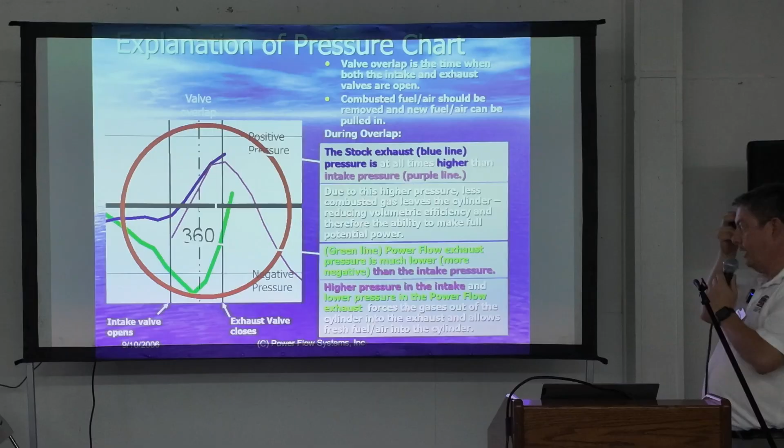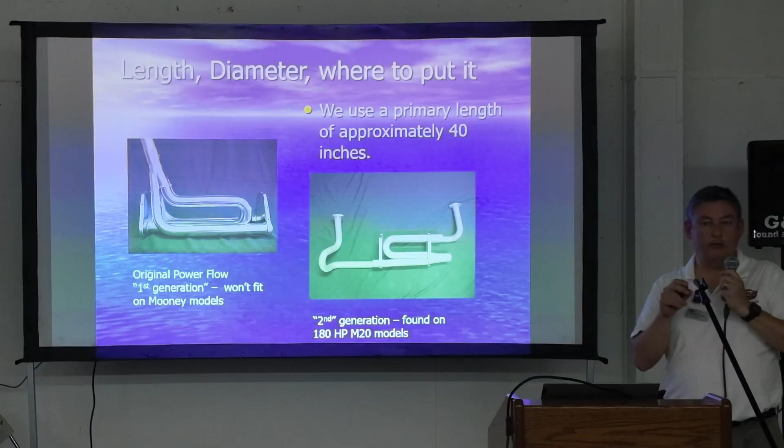If you take a piece of string and go all the way around to here, and then all the way around to here, you're going to get the same number within a very small tolerance. That number, by the way, for this particular setup is around 40 inches. So 40 inches, 3.5 feet of tubing before those gases can possibly interfere with each other. And the truth of the matter is they can't interfere because it's a supercharged high pressure.

So you make a big exhaust pressure in here, and then there's a pause. What do you think comes after a high pressure? A low pressure. The timing of the tuning is to make that low pressure be when your valve opens next. That's all tuning is, it's timing it.

It took me a long time, I'm very slow. I have the most perfect job to prepare for this. I played the trombone for 12 years. That is, by definition, a tuned exhaust. It took me like 15 years to figure out, wait a minute, I was prepared for this job the whole time. That's all that is. You want to change the resonance.

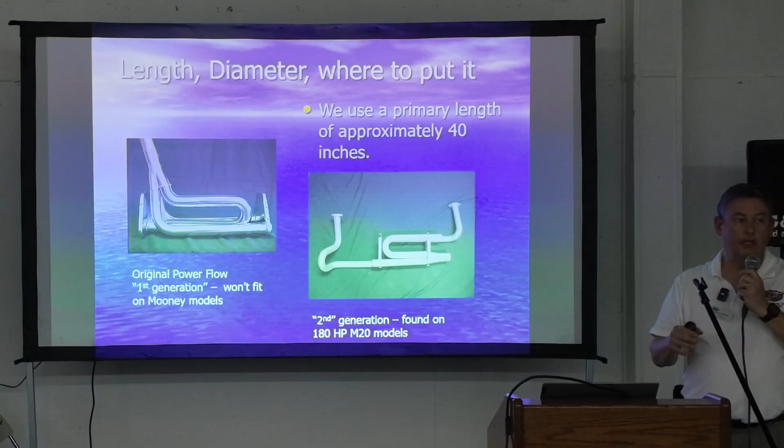Now, we don't have to change the resonance in an aircraft because we operate in a very small, limited RPM band. Most airplanes operate between 2,200 and 2,500 most of their time. Yes, constant speed people can take off around 2,700, but you don't cruise there. You tend to back off down into the 2,200 to 2,500 range. Fixed pitch people can't get to 2,700 on takeoff. They're around 2,450. That's where we tuned it for, 2,450. Why? We wanted to give it the biggest results on takeoff and climb.

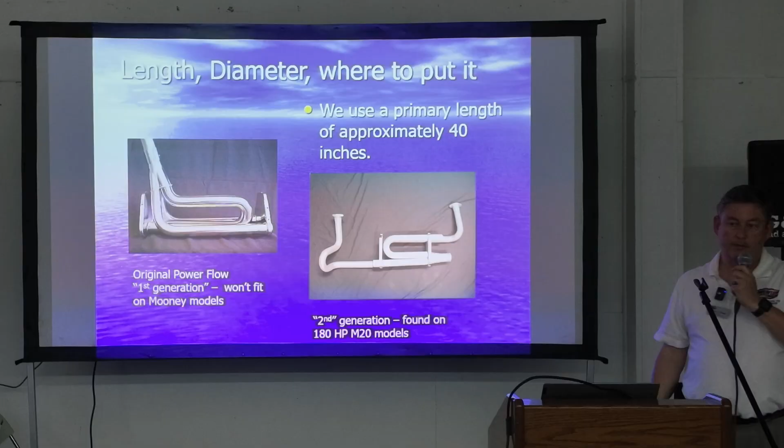It's also an important thing because if I wanted to, I could make the exhaust system produce more power through that harnessing and emptying thing we were just talking about than the engine was rated for. Technically up to 7% more. But then I have a new problem. How do we explain your 160 horse engine that's certified for 160, on an airframe certified for 160, and I just made 172? Those people with the initials that start with F and end with A would have a real issue with that. We don't want to do that.

So we've essentially targeted the RPM band to not only be the most useful, but also to be careful to not go over the rated horsepower. On a fixed pitch airplane, 2,700 is where the top horsepower is. Just don't go over 2,700, we don't have a problem. Constant speed, the airplane takes a bigger bite out of the air, so its torque just takes that and slows down the engine. It's not tuned for 2,700, it's tuned for 2,450 or 2,500, depending on what we're talking about.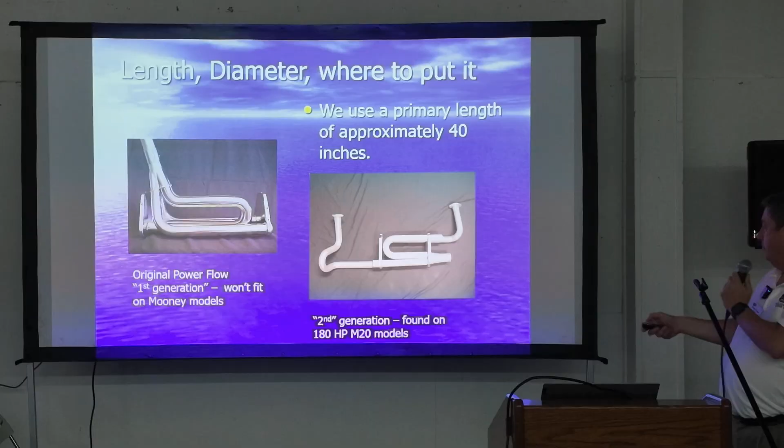What do we do after this? That's called the collector. Then there's another tube. That tube is where we put our sound chamber. And the way we do it on what we call our legacy products is it's a non-obstructive muffler. It's literally a round tube. You can see right through it. Looks like this. It's that with some wrapping on it.

A lot of people say, oh, it's a glass pack. Well, okay, sure, it's a high-tech glass pack, but there's no fiberglass in there. What's in there is stainless steel and basalt fiber, and that wrapping will eventually dissipate over time. But the clever thing is, this is certified even with that wrapping gone. It just gets a little louder and you lose 1.5 horsepower of the gain you had because we've changed that dynamic. And it's designed to be replaceable. So you don't have to send this thing out. You just pull out these 4 screws, put a new one in.

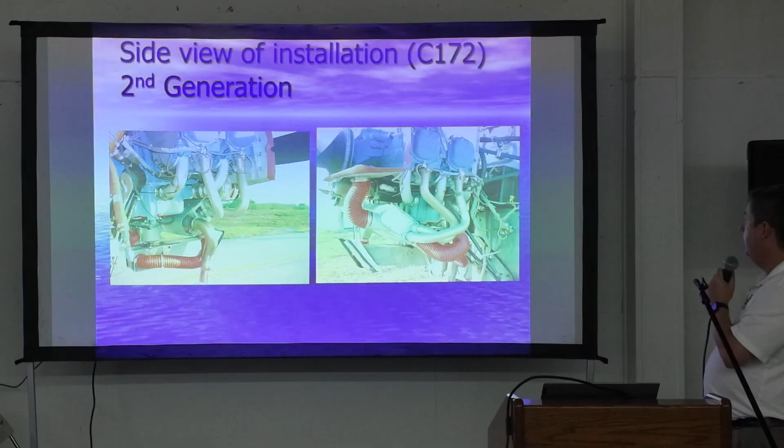How do we do it? That's what it looks like in a Cessna 172 type exhaust. Now, remember I talked about how your engine wants to move, okay? We are fanatical about this. There's no clamps holding this here. These are dynamic slip joints. It's dynamic because it is meant to move. When your cylinder expands just a little bit, we want it to be able to pull like a trombone. It moved a little. When it cools down, it can move back in.

On these style systems, during your detailed inspection, we mandate that you take off the exhaust system, you open it up, you inspect the cabin heat area.

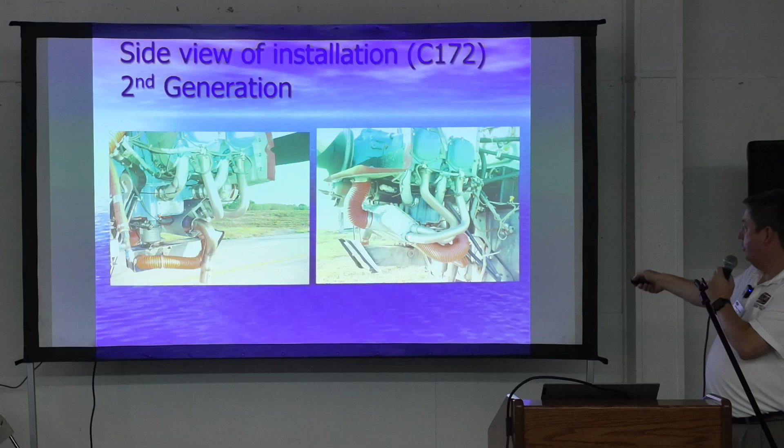Which by the way has less than 10% of the welded area that the normal exhaust does. And we want you to make sure you lubricate that with high temperature anti-seize, because that's its weakness. If you don't lubricate it, it will dry out, and now you might as well have welded it.

Okay, Rube Goldberg runner-up, but that's how we did it on the Cardinal RG. The pictures are very low res, sorry about that, I don't know why that occurred.

So how long do these take to install? Well, the initial installation is in the, call it 6 hours, unless you're a Cessna 180, 182, 185. That gets a little more complicated because you have to make a new hole. Unless you're a 1956 or 57, you have an exhaust exit on the right-hand side, you need to have one on the left. So you have to cut a hole. We provide a template and all that.

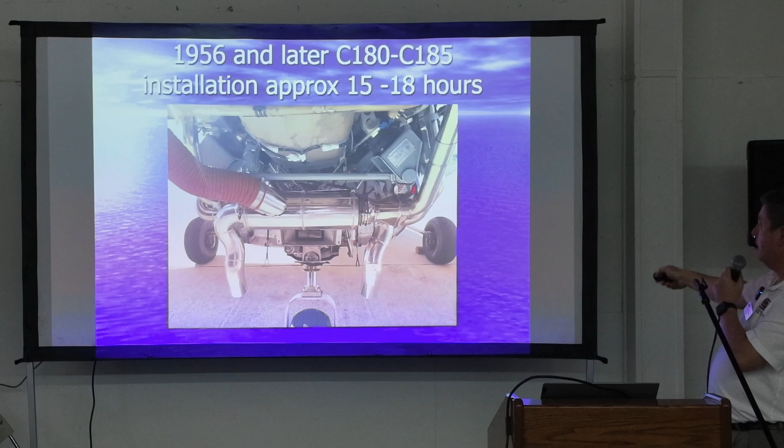That's a tuned system. That's the leading edge design that we've enhanced and brought back into production. These gases here run through this central chamber. This does have a flame tube, but I tell you, it is heavy, heavy duty. Typical expectancy on a muffler, I'm speaking broadly, is somewhere around 1,000 to 1,500 hours of a traditional OEM design. You're nodding your head. You kind of agree with that number?

Agreed, yeah. Okay. We got a guy in Hungary who decided that he finally was ready for a new one at 3,500 hours. Very overbuilt. So one of the things we decided when we brought it back into production was, if it ain't broke, we ain't fixing it. So it is still incredibly overbuilt, and we like it that way. So these gases come in here, go through that flame tube, exit over here. And then likewise on this side, what's in here is literally 2 seamless tubes.

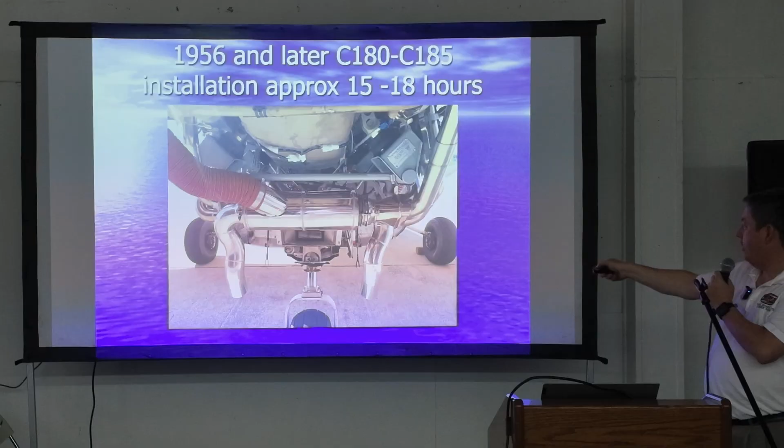And funny quick story on that, we're the only customer for that tube size in North America. And boy, does the steel mill know it. So when we first bought it, it was 20 bucks a foot, and we had to buy what seemed like a lifetime supply. And then they started playing games with us, and they said, well, oh, you really want it? How about 60 bucks a foot? I said, I don't like it at 60 bucks a foot. They said, okay. So then when we went back to them, we got real serious because we were running out. And we said, okay, now we're really ready. They said, yeah, now it's 160 a foot. So I told our metal person, I didn't get the screw you on the first call. It came through loud and clear on the second one, though.

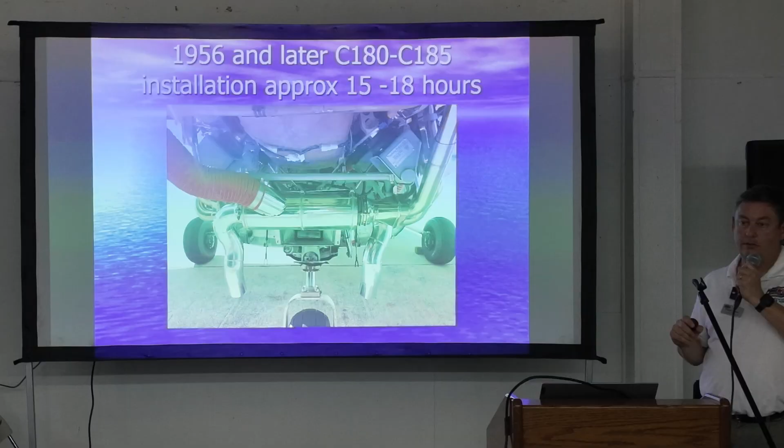So we scrambled and hummed and hawed, and we had to say, well, what do we want to do here? That's your cabin heat underneath that. I did not want to get into the welding business, doing what everyone else does. You take a flat piece of metal and you roll it and you weld it. Because now you have a crack probability, right? And I'm trying to buy insurance for everybody. So we had to talk and beg, plead, and do whatever else we needed to do. And spoiler, we finally got them to come back down to 60 bucks a foot. That's what we just had to do. We had to suck it up and do it because we did not want to compromise on our design integrity. But this is the silliness that happens when you're the only customer for something like that. And so that's what we do.

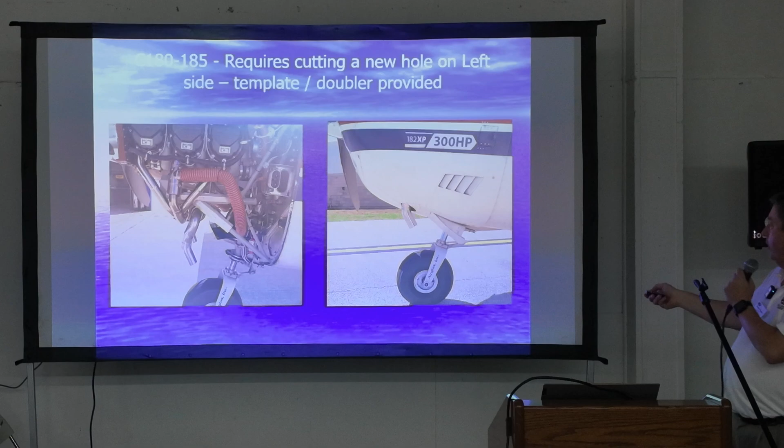This is what it looks like on the side. There's that new hole cut out. We made some interesting improvements that weren't there before. For those people that are on floats or they have really giant 3-blade props, this cowling has to drop down 2.5 inches and move 2.5 inches to get around that, we call it the hook, okay? That's out that far for carbon monoxide avoidance. It also doesn't put stuff on your cowl flaps, and it doesn't make you go on your belly.

Well, if you can't drop it down and aft, we came out with a version of this that's 2 pieces. You literally just drop the cowling down straight, which is revolutionary for those of you that ever fought with a Cessna 185 exhaust where the thing is coming out at this weird angle with a hook on it, and you're trying to go around the big 3-blade prop and really have a good time. Now you undo the bolts and you go down. So those are the kinds of design innovations we try to do. That's the carb heat.

All right, so why would you want a tuned exhaust system? Well, you want more performance out of the engine, but you don't want to go through that huge expense of getting a new engine. Maybe it's not even a possibility. Some aircraft, there is no STC version where you can go bigger. So you consider this. So there's an apparent gain. Oh, this is the great numbers.

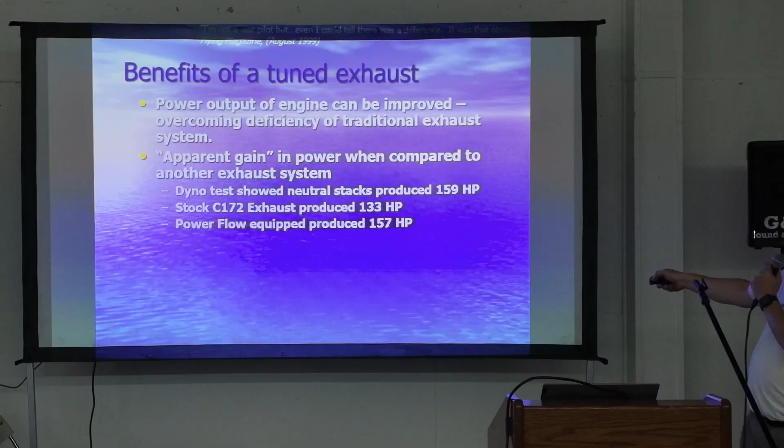So that 160 horse engine I was talking about, we dynoed it. What we did was we took a 160 horse engine, we put the neutral stacks, the same things that Lycoming puts on, and it did 159 horsepower. We put the stock exhaust on it, it did 133. Put on the tuned exhaust system, and it made 157. That is a 24 horsepower gain over the stock, but we did not go over the 159 or 160 number. That's what I was telling you about where we essentially derated it slightly. We optimized it for the RPM that we all care about, not the one that is possible.

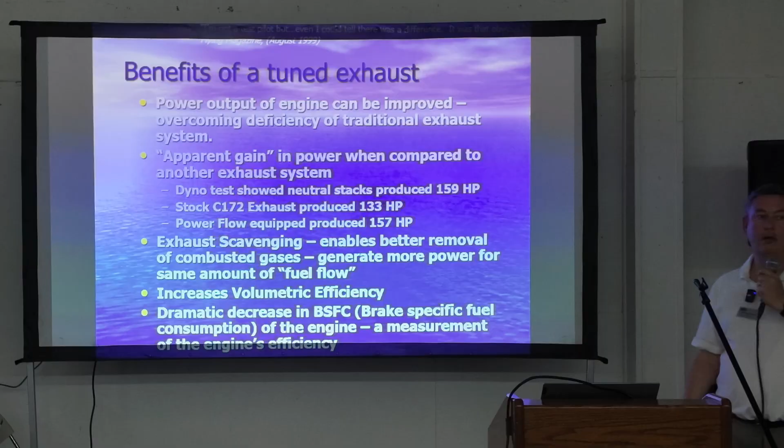So what is that? That gives you that extra performance by that scavenging. So the volumetric efficiency is improved, and technically your brake-specific fuel consumption goes down. It takes less gas to go the same RPM, same speed. That's cool. I mean, literally it's cool. Your cylinder heads will be cooler too. One thing that does happen, if we've taken the temperatures out of the cylinder, what do you think EGTs did? Did they go down or go up? We have one vote for up. Anyone want to vote down?

Yeah, if you take the gases out of the cylinder and it lowers the CHT, does your EGT go up or down? Yeah, it goes up. It makes sense. The thermal energy doesn't just dissipate. It's got to go somewhere. So it went into the EGTs that go up. So it is normal to see a slightly elevated EGT. That's okay. EGT doesn't damage cylinders nearly as much as CHT. All right.

I talk too much, you know, and I'm going to run out of time. So I'm just going to click through these things occasionally. Does anybody have any general questions you think would be useful for people? Yes, sir.

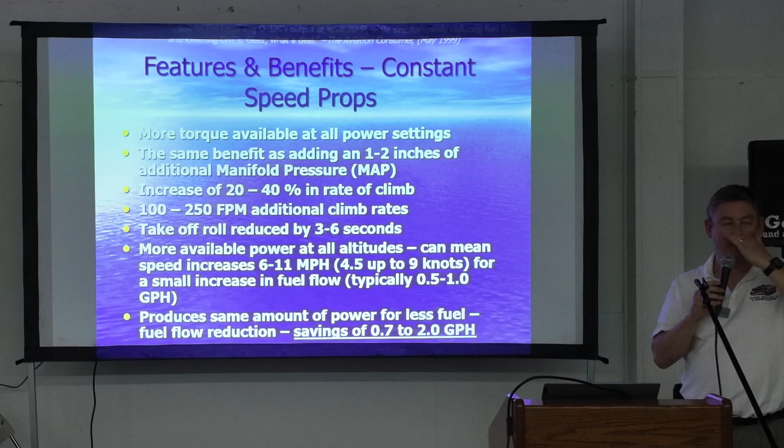How would you handle it with a turbocharged engine? Quite simply, we wouldn't. The turbocharged engines, their exhausts are very fundamentally designed, and that's usually the only exhaust ever supplied by the engine manufacturers, and they're all meant to work in harmony. It is possible you could tune an exhaust system for turbo entry, but the juice is not worth the squeeze. There's not a lot of room in there already.

Sir? On your straight pipe there, did that then meet the decibel level for the manufacturer? Yeah, so all of our exhaust systems, we have to prove to the FAA that we are not any louder than the original OEM, and we do prove that. Then the next question, have you thought about putting a stainless screen in there? Because if the screen blows a hole in it, it's not going to happen. It is made of stainless. I'm sorry? It is made of stainless. Whatever's inside is stainless. Yes.

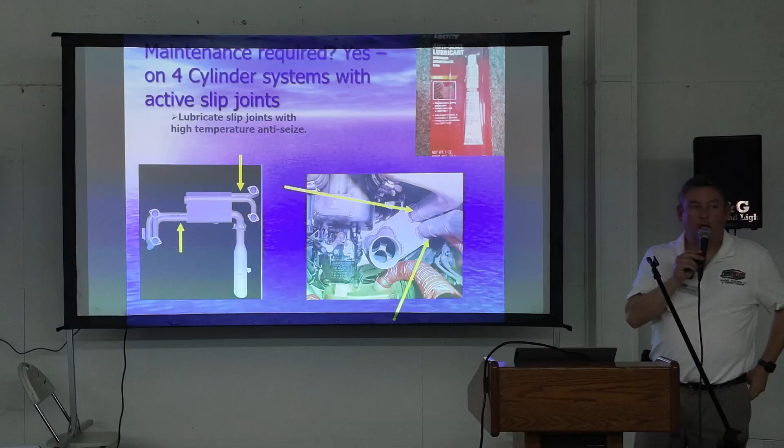Any chance of putting a screen in there as opposed to the baffle? Because I see it did lose part of the screen going through as opposed to the baffle. Yes. Well, he's asking what if we put like a stainless screen in there, sort of like a capture system for the baffle. Some of our systems have that, some of them don't, and it really depends on the noise issues that we're dealing with.